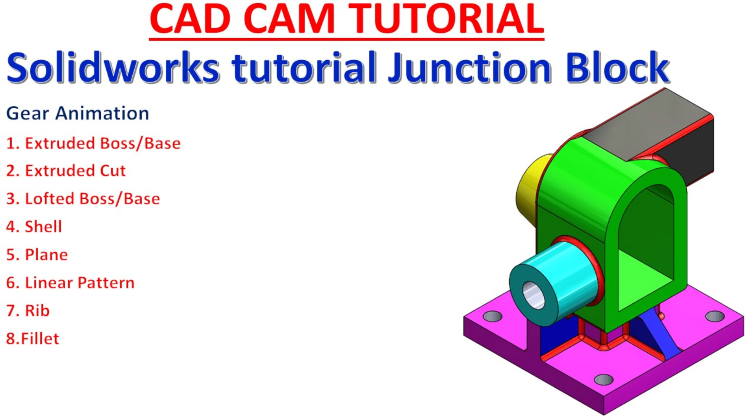Junction block. In this exercise we will try to learn many features, that's why it is a little bit longer exercise. So let's zoom in, this is the front view, and we are going to start from this view.

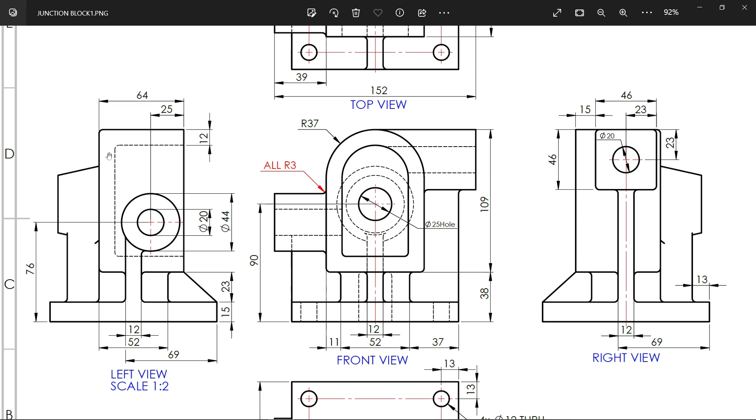Now you will see the centerpiece R37, and this width, this width 37 into 2, height 109. If you see the left hand side view, the depth is 64 millimeter, but this is hollow shape, thickness 12 millimeter. Then similarly at the bottom there is one square type of piece.

You will see, if I zoom, 52 this width. This is center from front view, and from left view you will see this lies at the back side, from this to here 52, and this is 11 millimeter from one corner.

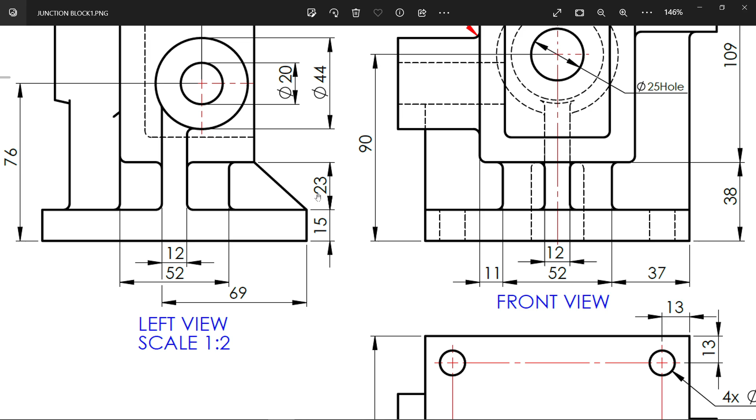Then at the bottom, this width is 23 millimeter, see, and at the bottom there is one square, 12, 12, and the location for this, you will see from this side 37. Just note down from here and go to top view, and from back side, this is the back side 37.

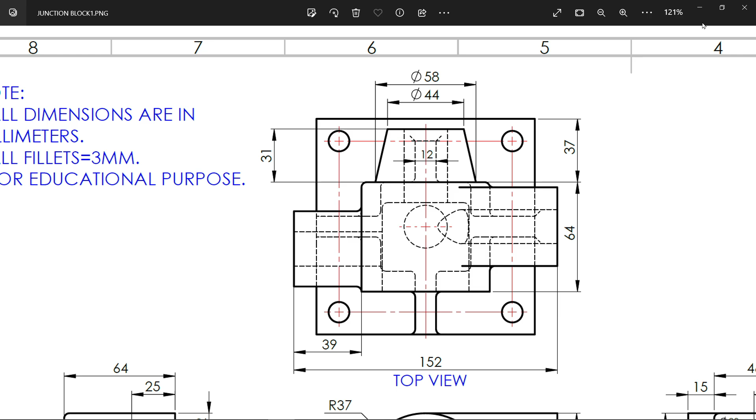Now the most important thing, we have to choose a plane. So I'm going to select right plane, sketch. Let me activate circle, then activate line tool.

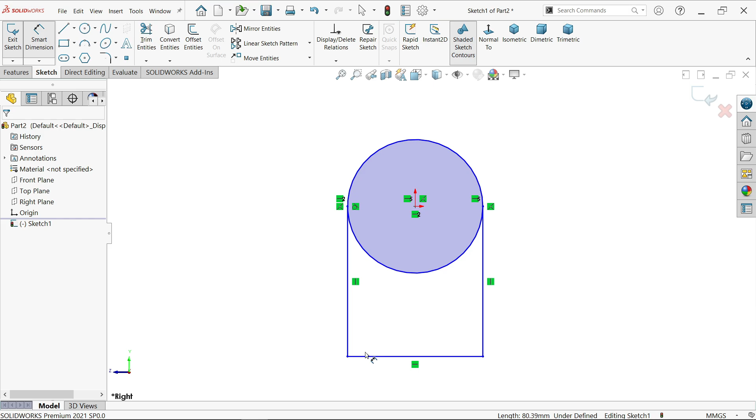Just start from one end, right click, select. Now this is not vertical, so click and it will show you this option, choose vertical, smart dimension. Now hold shift key, select this line and go to top line, move cursor outside and leave, and here's 109. See, if this diameter is 37 into 2.

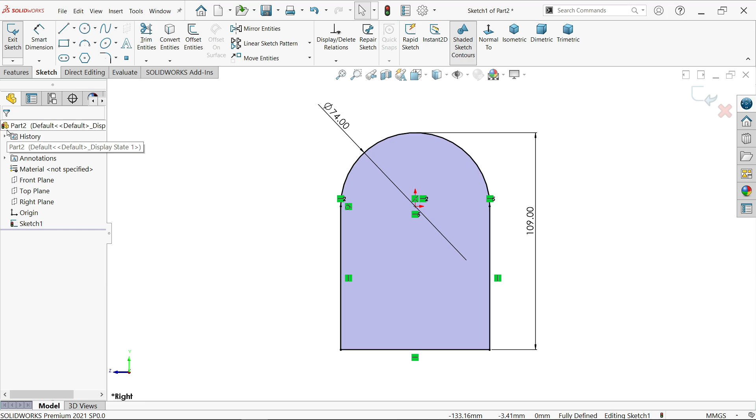Activate trim entity, power trim, just press left mouse and drag, and see this is trimmed. Activate extruded boss base feature. Now start condition we will keep same, end condition direction 1 blind, and here depth 64 millimeter. See, it is moving in one direction, that's it. This is what we want.

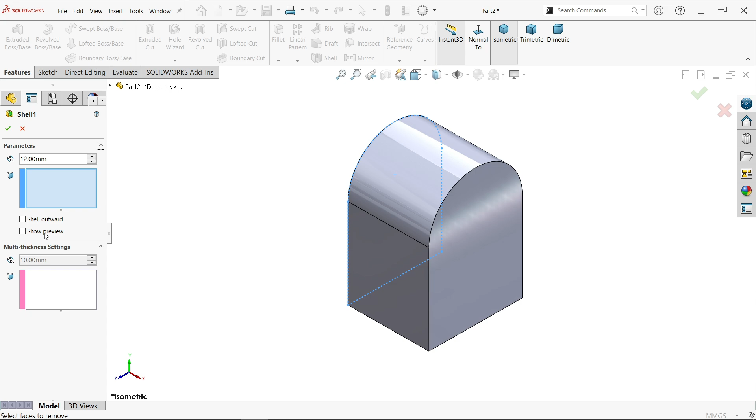Activate shell feature. Here depth 12 millimeter, show preview, and let me choose this face, say okay. Now look.

Bottom sketch. Now activate corner rectangle here, activate smart dimension. Now this is 52, width and length both 52, and from one end dimension shows 11 millimeter, right? So this is any one, because this lies at the center.

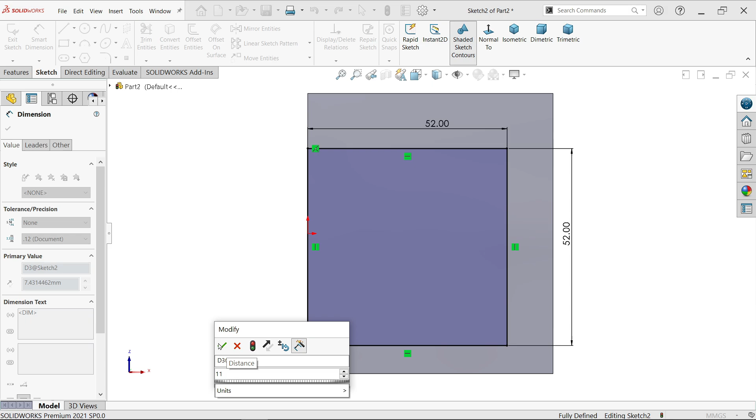If you rotate a little, extrude. Now here start condition same, end condition blind, 23 millimeter is the depth, say yes.

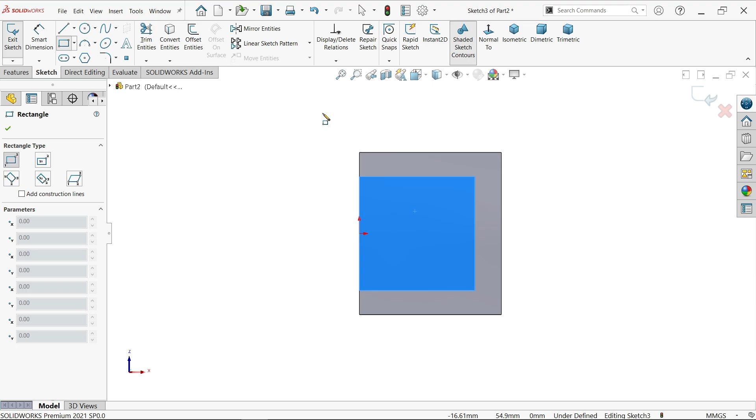Okay, now again select this one, sketch. Now here we have to create a big corner rectangle. Now right click, exit. Now select these two rectangles and make one relation. If you select both and leave shift key, it will show you this option, equal, smart dimension.

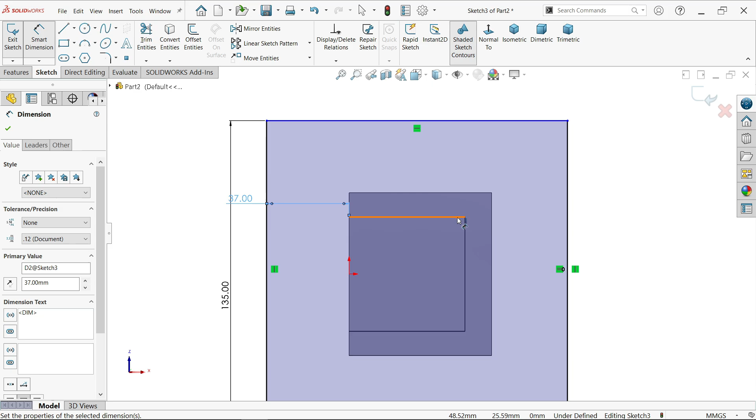135. Dimension from back side it is shown 37. I'll show you in the drawing, and dimension from this bottom face to this edge 37, it is shown in front view.

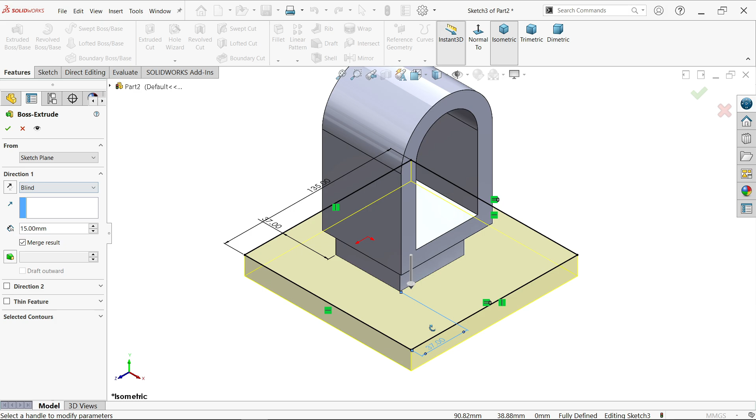Extrude, and the depth is 15 millimeter. Keep end condition blind, and it is moving in the perfect direction, so no need to change it, say okay.

Now there is one hole, but this hole we will create later. Come to this side, right hand side view, there is a 44, 20, this is the hole. You will see the hole up to the end of this wall, 25 millimeter from here, height 76.

So let's do this. Sketch, circle, activate smart dimension, and distance from bottom edge 76, and this diameter 44, and the distance from outer edge is 25 millimeter. Look, this is fully defined sketch.

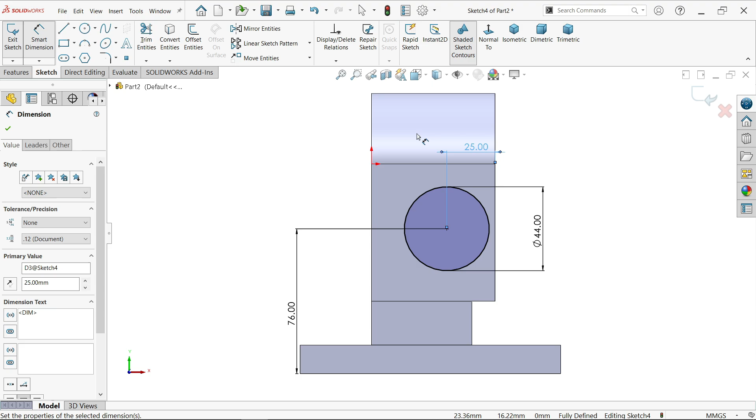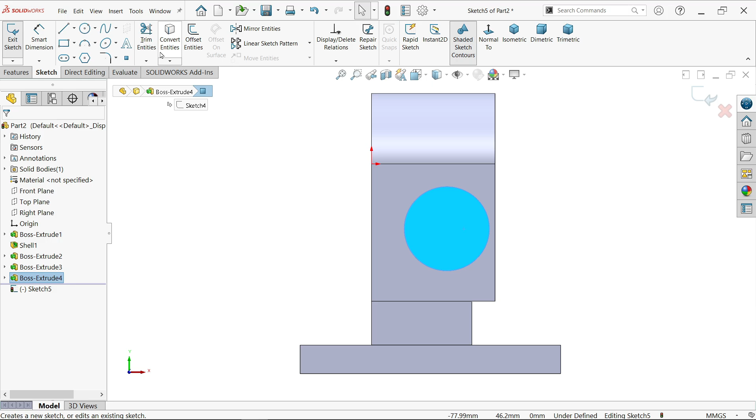And how long we need to extrude? Now you will see in this option 39 millimeter. Extrude 39 millimeter, say OK. Now select this face, sketch, activate circle tool, and keep cursor and you will see the center point.

Draw, activate smart dimension, and this is 20 millimeter. Now again, next extruded cut. Now here there are many options you can choose in end condition. Start we will keep same. Now here either you choose up to next.

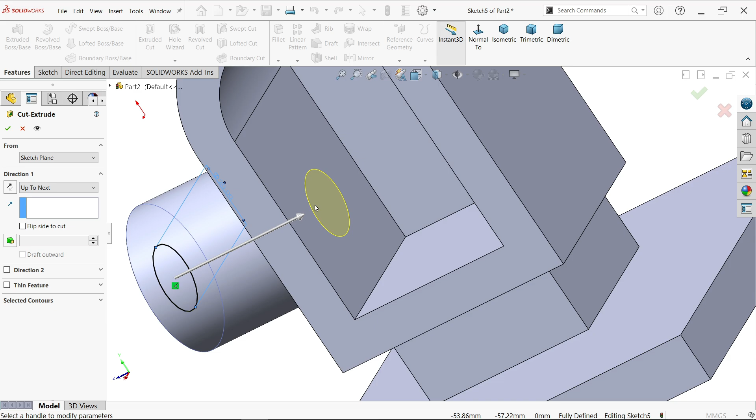If you choose next, this is the next wall, it will cut up to the next. We can't choose through all, otherwise it will cut through all the body. So the best option is up to next. See. Now come to the bottom view.

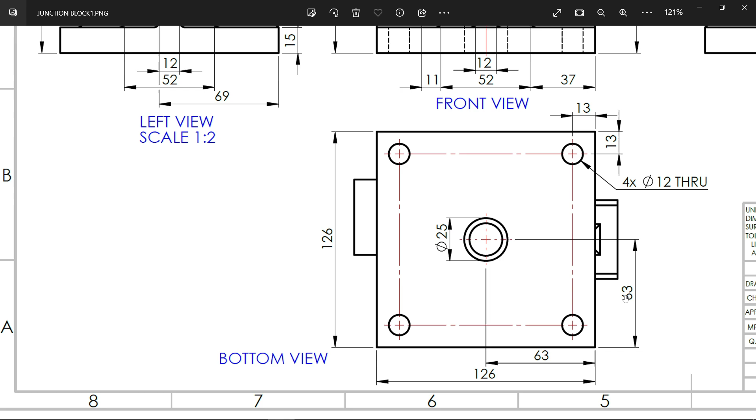There are 4 holes. See, 13, 13, 12, and the distance between this, if you calculate, it is 100 millimeter. Then there is one more hole, this just lies at the center, 63, 63, 25, and the depth of this hole you will see here.

If I'm going to zoom, see in front view, you will see this dotted line. This is the hole, depth 38.

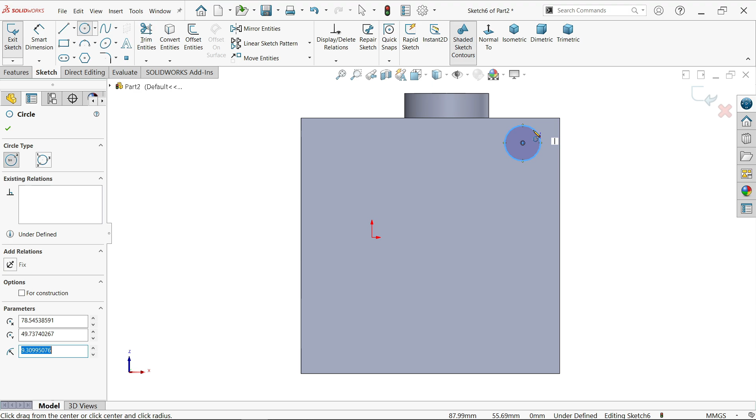Sketch, circle, activate circle tool, smart dimension. Now define this. Diameter is 12 millimeter and distance from one end, both ends 13 millimeter. Select this one and this outer edge.

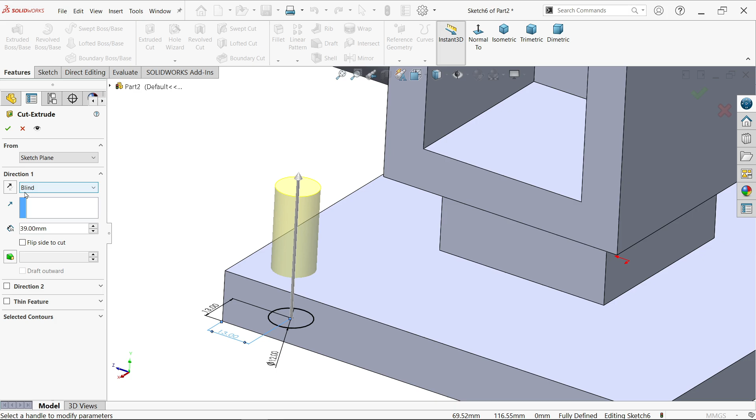Now activate extruded cut feature. Again here you can either choose through all. If you choose through all, it will go up to the end of body. So it's better to choose up to next. Even though you can choose blind and give the depth. Now here again we will do one more thing.

Activate linear pattern, first X direction. I am going to choose this one. Distance you can calculate, it's going to be 100. 2 number of instances. Direction 2, I am going to select this side arrow, 100, and this is moving in reverse direction, so simply reverse this arrow. Here, look. Say OK.

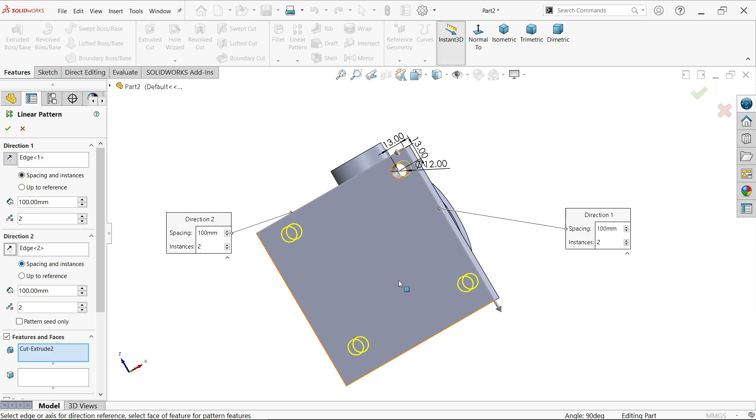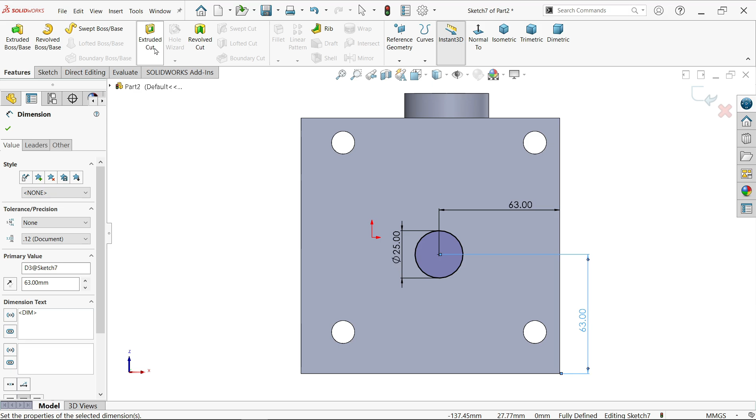Select back face, sketch, activate circle, smart dimension, 25 millimeter, and distance from both sides 63 millimeter. Okay. That's it. Activate extruded cut feature, and here depth is 38 millimeter according to our drawing. Say OK.

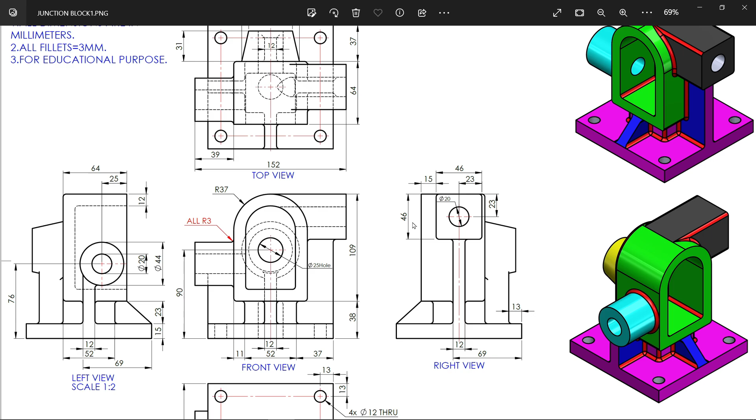Now few things we covered. Now here the next thing, we are going to make this upper face, this one you will see 46, 46. There is a hole 20 diameter, and this lies at the center 23, 23, and from one edge it's 15 millimeter. See, but we have to create a plane. From this face to here it's 152 dimension.

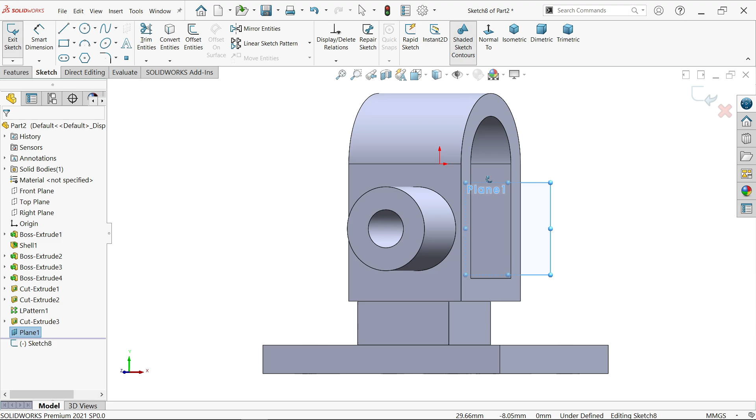Look, reference geometry, activate plane and select this one. And here I am going to choose 152, make flip side, okay, sketch. Now this is not reverse. Now this is the position.

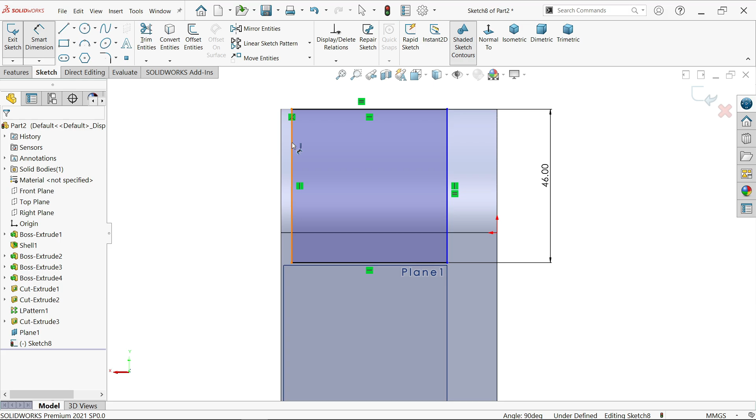Activate corner rectangle, smart dimension 46. Okay. Here now hold shift key, select these two lines, leave the shift key, and you will see this pop up, or even on the right hand side you will see the options equal. Smart dimension 15 millimeter. This is the important dimension. Now this is fully defined.

So go to feature and select extruded boss base. Now in this condition, what you have to choose, plane we have to keep same, but here I am going to select end condition up to surface, and I am going to select this surface. You will see how it moves up to this surface. Say OK. Now look.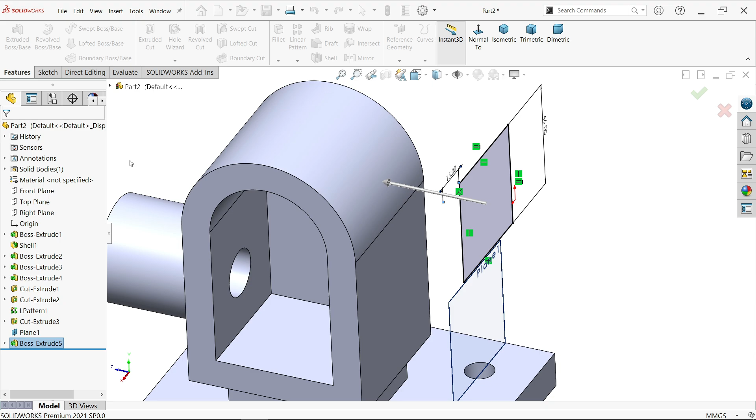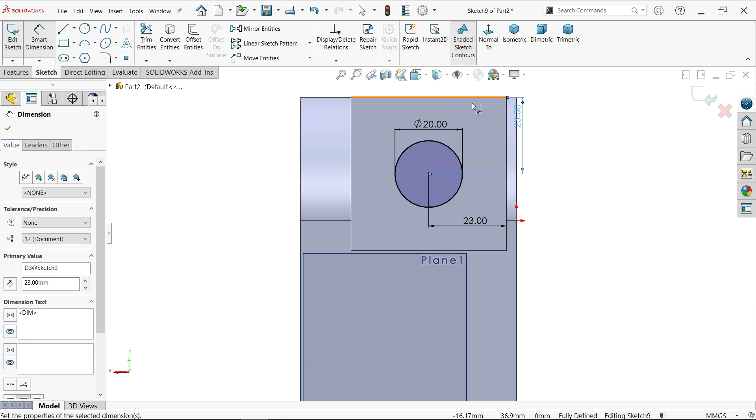Sketch, circle, smart dimension, 20, now distance from both ends it's 23. Extruded cut. Now even here also we have too many options. If I choose up to next, see, this is going to cut up to the inside wall. Say OK. Even though you can choose surface. Look.

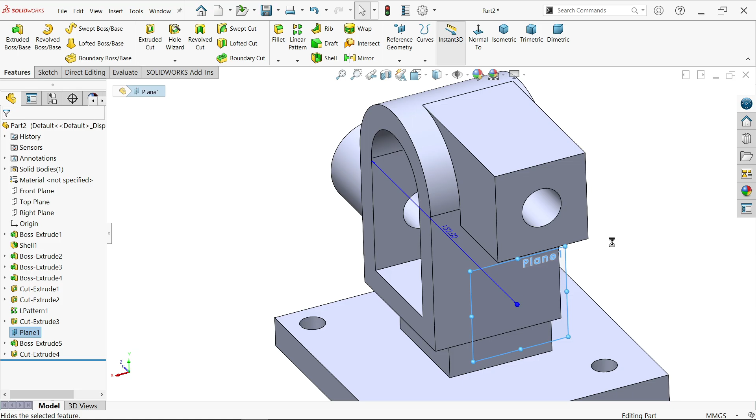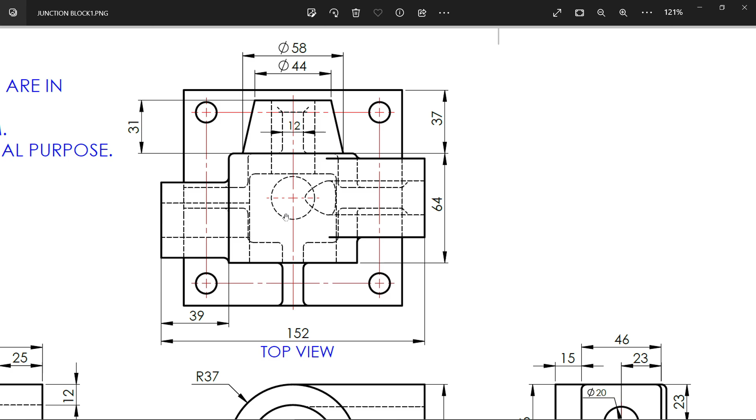Click on plane, hide. On the back side, or if you see in top view, the back side there is one loft. We can create this with the help of loft feature. Now see, 58 inside, 44 outside, and the depth of this 31. So we will create one plane for this, and then there is a hole also, and this hole you will see in this view, 25. Location at this 90 millimeter from here. This is important.

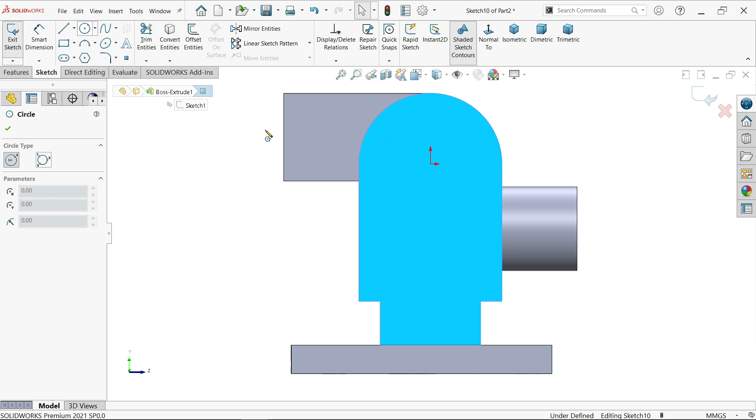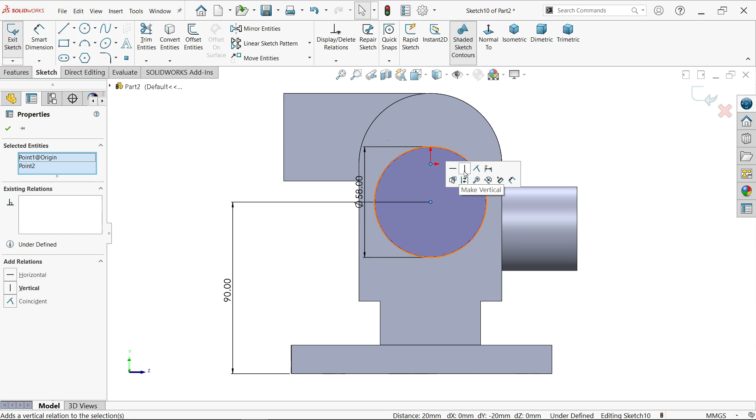Now select this face, sketch. Now here the bigger diameter 58, and distance from bottom edge 90. And one more relation, just select shift key, select these two center points and origin point. Now see, this is fully defined. Simply exit. Activate plane. First reference this one, then here depth 31.

See? OK. Now select the plane, sketch, activate circle, and draw a circle at the same center point. And the diameter of this circle, activate smart dimension, 44 millimeter. Exit. Now let me hide this.

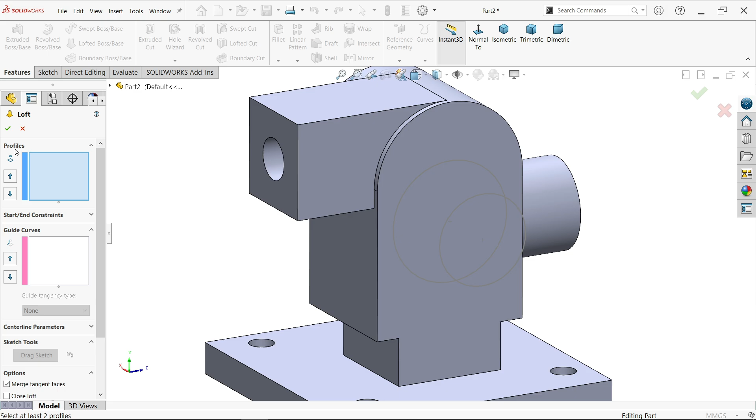Now here go to feature, activate lofted boss base. Now in lofted boss base, first you have to choose profile. So I'm going to select 1, 2, these two profiles. See, these two nodes are okay. This is straight, so we don't need to change because this is a simple thing. So we don't need any kind of guide curve.

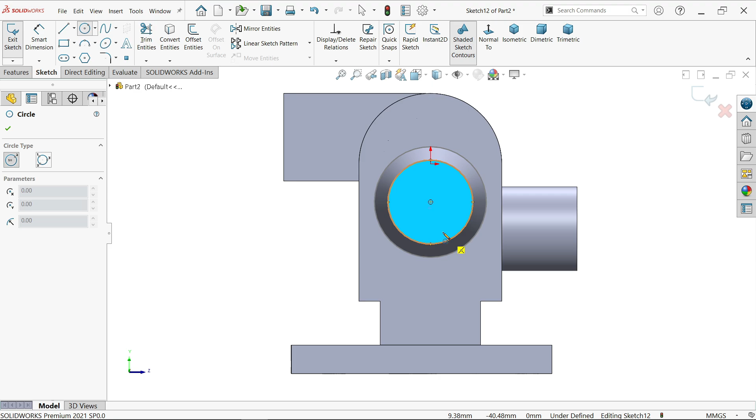Say OK. Look, I am going to select this face, sketch, activate circle, and move cursor, and you will see center point. And here the diameter 25. Extruded cut. Now in this condition, even though you can choose up to next, say OK. See, the hole is created.

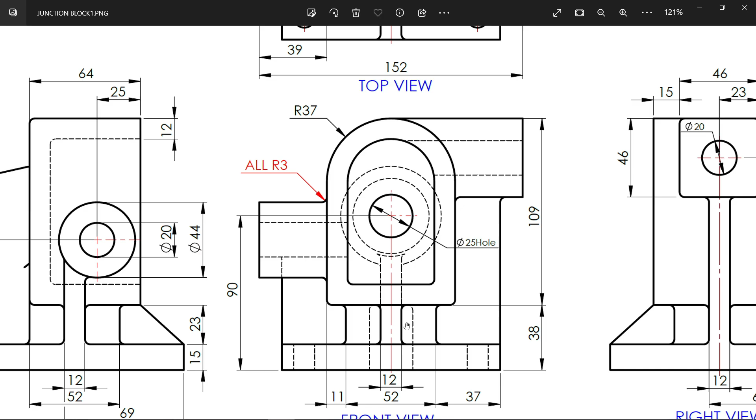Now let me create one rib here. See, there are 4 ribs. So let's try to create these ribs. This rib at center. Now this rib shows dimension from here 69, but if you calculate it, okay, we will make a plane, then we will create a rib. And this is center 12, all the ribs are 12 millimeter.

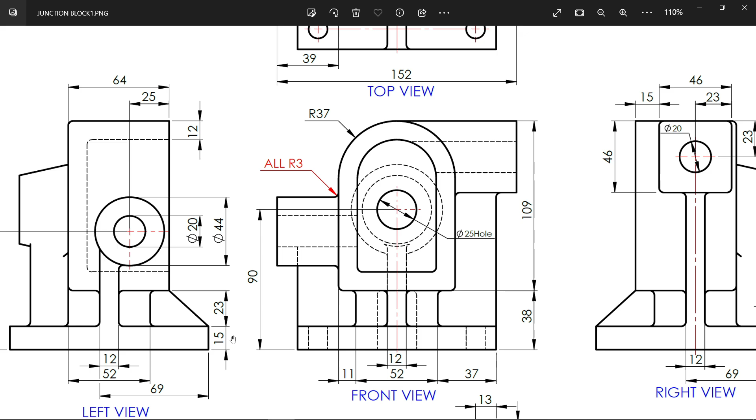Okay, first let me check where our plane is right now. Okay, in front, okay, this is already in center, so I am going to select front plane, sketch, activate line tool, and connect these 2 points. This is fully defined. Go to feature, activate rib. Now here keep both side and depth 10, and look, arrow moving towards body. So don't change anything, extrusion direction, everything same. Okay. Now here.

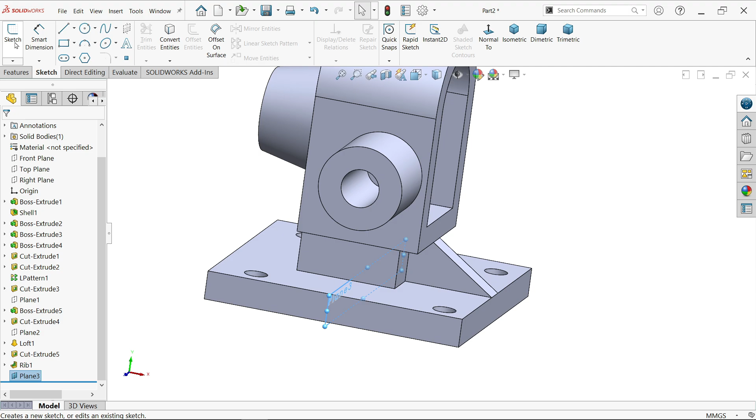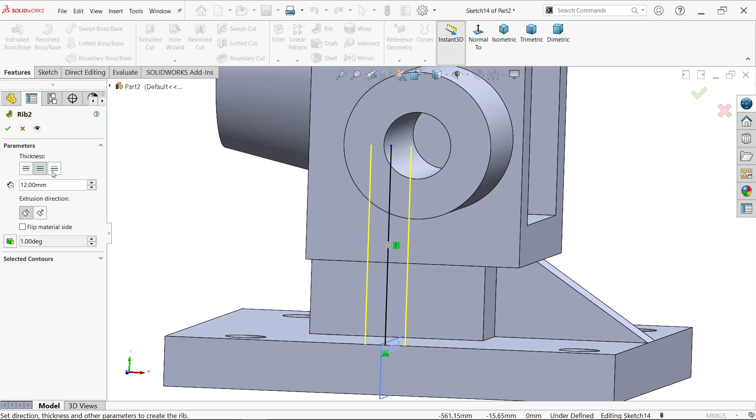Okay, let's keep it as it is. I'm not going to define anything, and I'll show you how. Rib. Now this time I'm going to select this end. Now look how it is going to move from here to here. 12 millimeter, keep as it is, say okay. Now look, the rib is created.

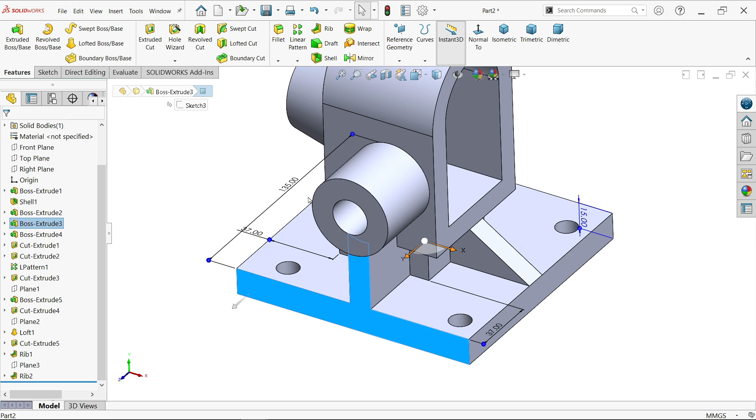Now hide the plane. Now there is one problem. We selected here 135. Just click 126.

Okay, now everything is perfect. Now here we have a rib at center. So simply let's try any plane. Okay, front plane is going to work for this.

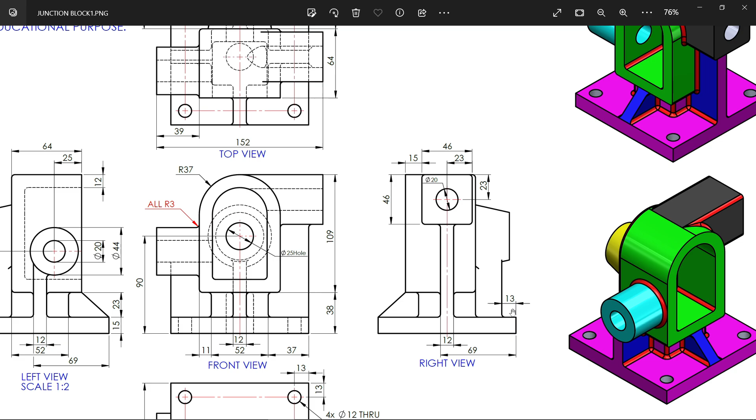Now in this case, this is center, but here you will see 13 millimeter away from edge, corner edge. See this one, and this is also lies at the center of this. And if you see, this is vertical to this, the second one. I'm talking about the second, fourth one, last one.

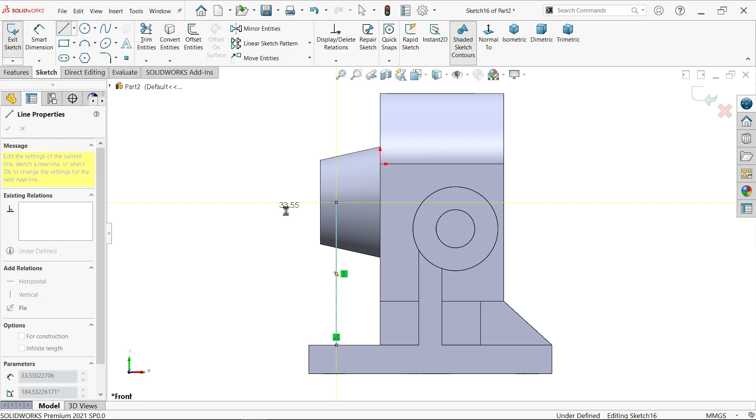Sketch, line, and start from somewhere from here. Smart dimension, 13 millimeter. Rib. Now see arrow moving towards body.

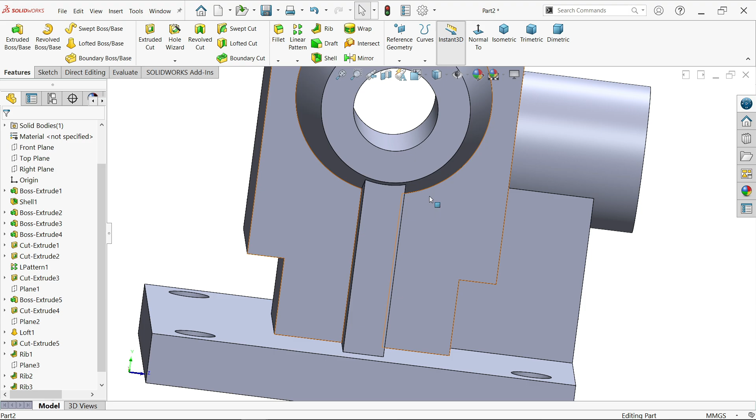Keep mid one 12 millimeter, rest as it is, say okay. Now see, this is not going to make anything inside. It is perfectly making this side.

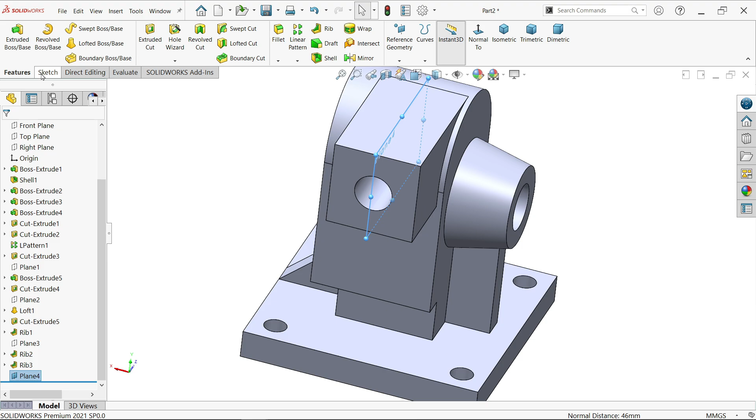Now similarly, we have to check which plane is going to lie, otherwise we have to create a plane. Okay, we have to create a plane at this center. So the simple way to make it plane, I'm going to select 1, 2. Okay, now create it at center, sketch, line, and draw from here up to

this line. Activate rib. Now see arrow moving towards body. Thickness, move both side, rest as it is, say okay. Look.

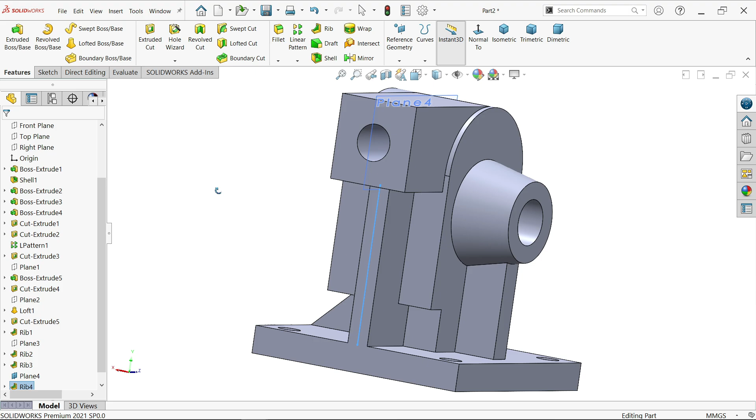Now click hide plane. Now here we have to choose all fillets, 3 millimeter.

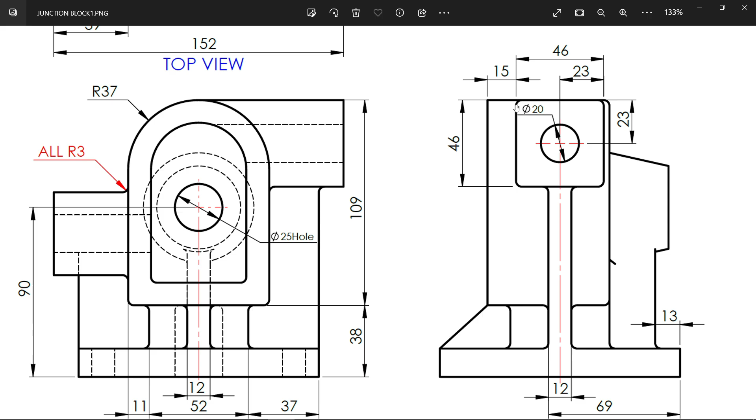Now just take a close look and see the fillets. Inside there is a fillet. See, this side also has a fillet. Corners, you will see these corners have fillet. Back side also has fillet. You will see here. Then here also see back side fillet. Inside also there is a fillet. This bottom also has fillet. And okay, this front doesn't have fillet.

Back side, this corner, and this doesn't have, and these ribs have it. This rib also, even though all these ribs have fillets.

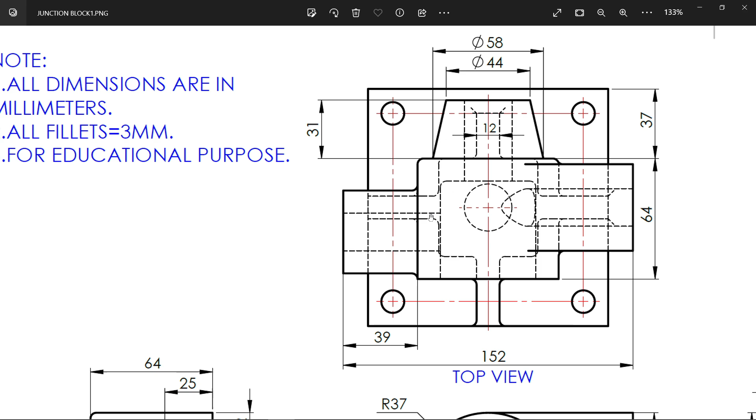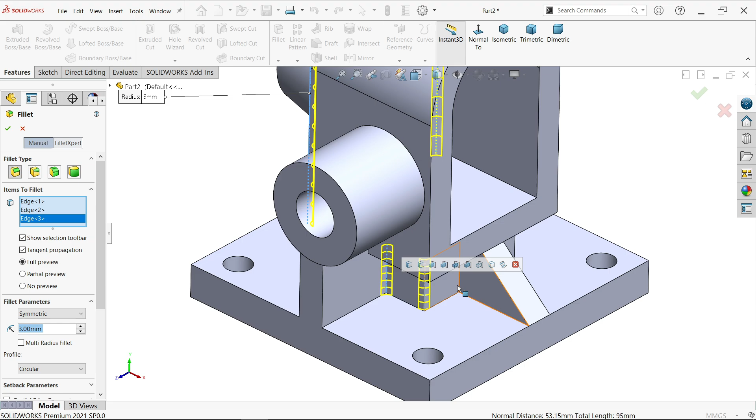Fillet, constant size fillet, symmetric, 3 millimeter keep radius. Now first we will try to choose vertical fillets. Vertical fillet makes your life more easier because the next fillet is going to make a perfect shape.

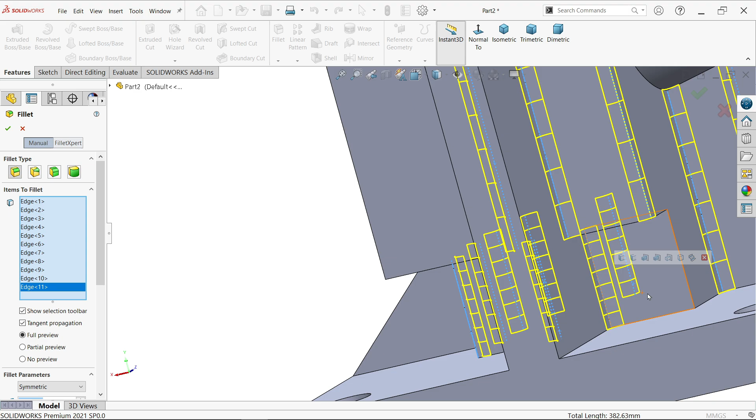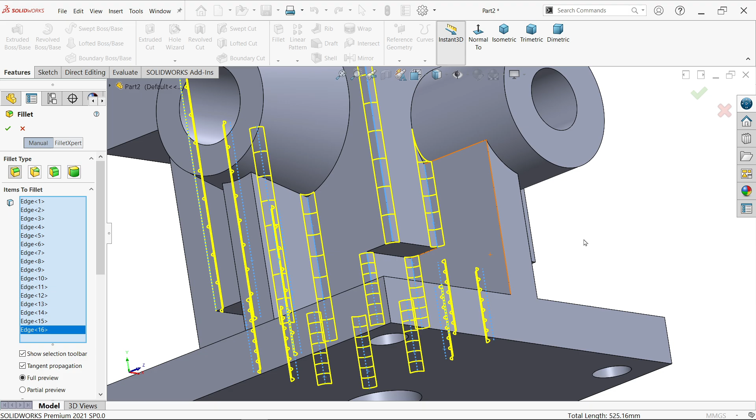Okay, this doesn't have fillet. Okay, come to these vertical ones, inside also. Say okay.

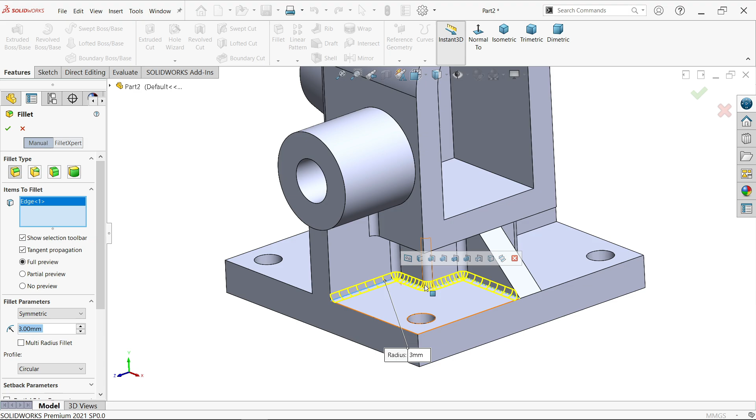Now choose again fillet, 3 millimeter. Now see, if I'm going to choose, it will select all at once. This is the advantage if we choose vertical fillet first. See, here also we have advantage. Here also we have advantage.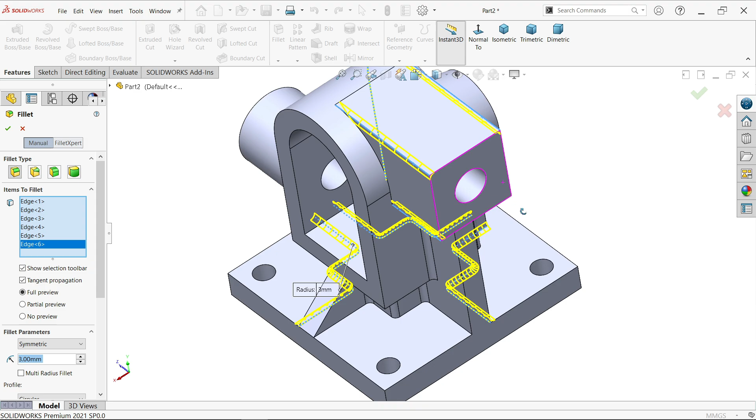Okay, let me select these four corners separately. Okay, that's perfect. Fillet.

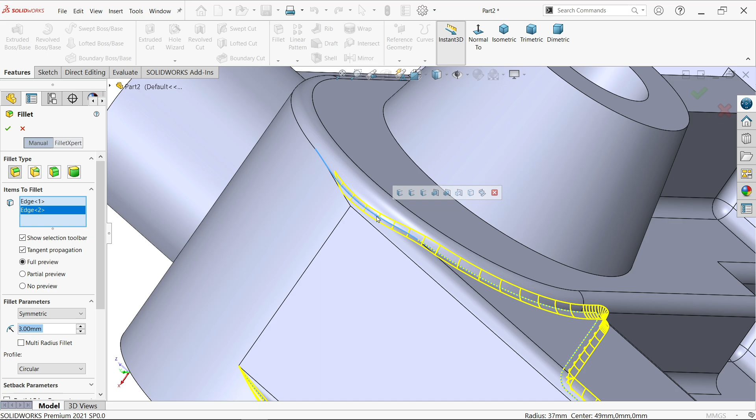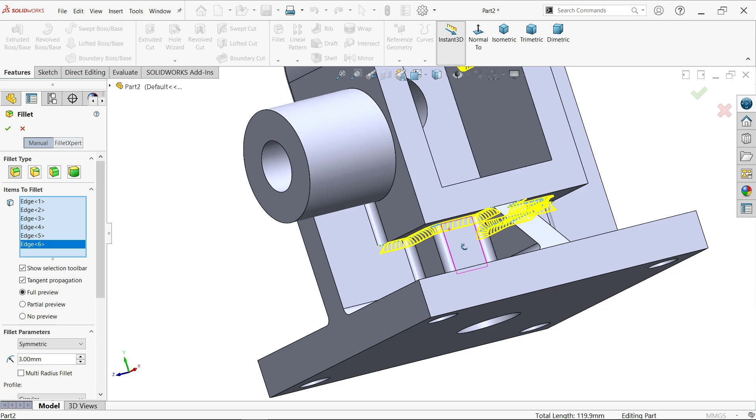Now I'm going to select this edge. I don't think we need to select this edge, but see, it is going to similarly comes here. Okay, here also balance. Say okay.

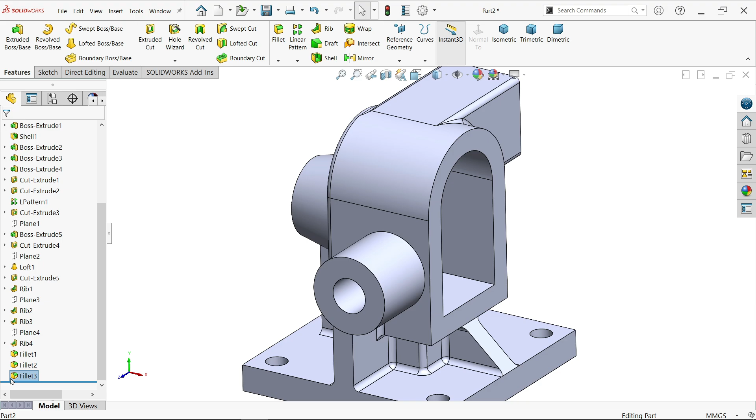Now let's check again if anything is left, or I hope we did all. Even though if you want to add, just click edit, and even if you want to add, just select this one. Okay, now here we go.

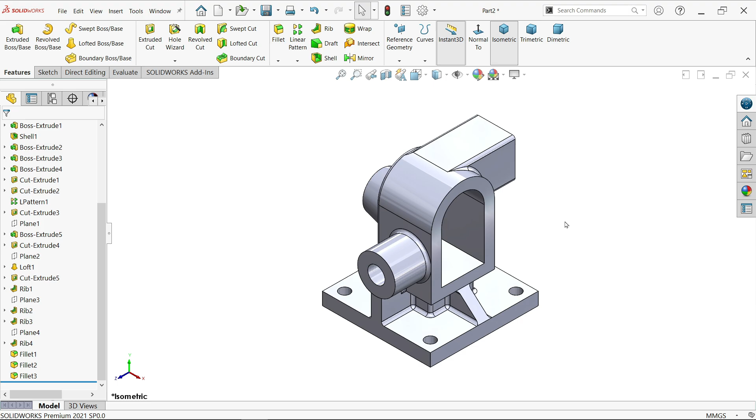Okay, now let's try to add color. Now the first one, shell, you can simply go to edit appearance, this one. Okay.

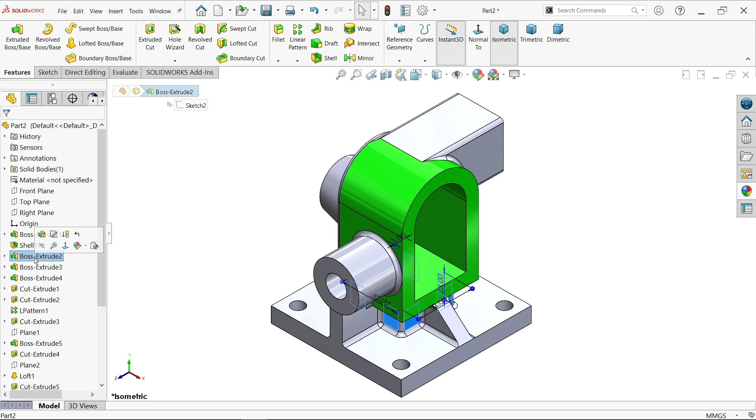Now the bottom one, bottom boss, edit, pink. Okay, now this one, even the cutout depth of hole, even okay, let's leave the hole.

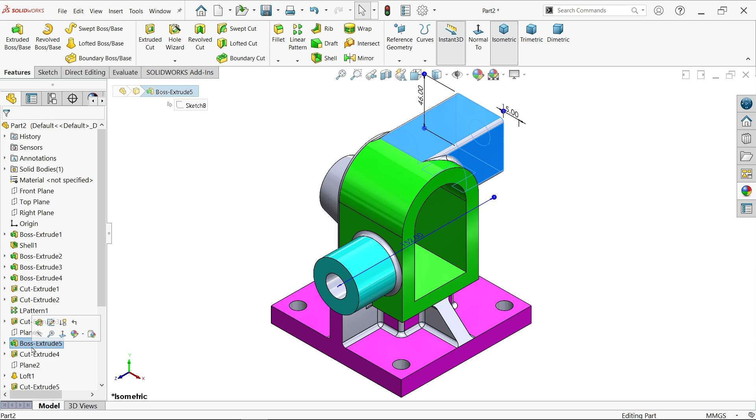Fine. Okay, now let me check this one. Lofted, edit appearance, and yellow.

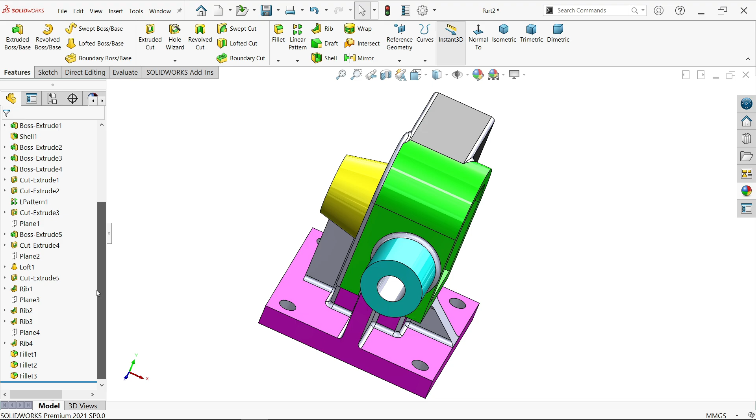Okay, directly choose this fillet, edit appearance, and directly choose red. Okay, now there are many ribs. Now all ribs, okay, let me choose rib 1. Hold control key, not shift. And for rib I'm going to select blue. Okay.

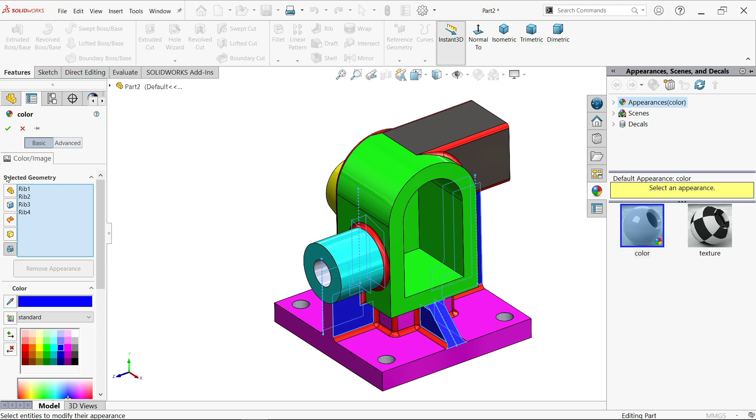That's it. Now this face is not going to turn blue because this is attached with this. Now but the face is changed, color changed. Now look.

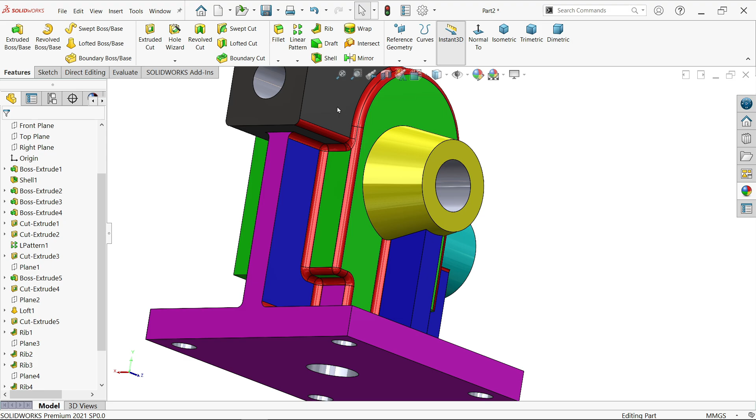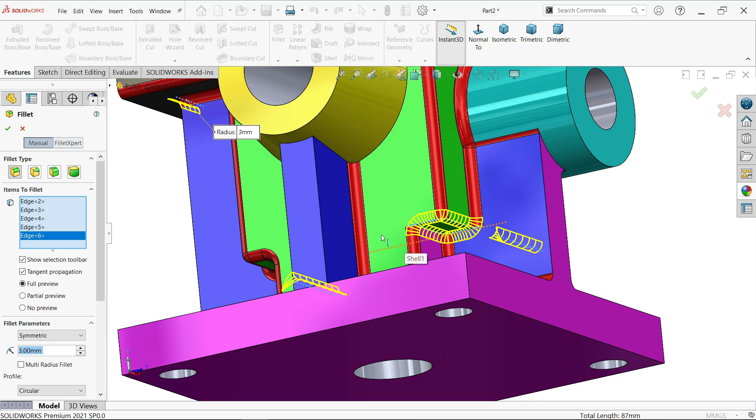Now here I feel some few more things are remaining. Now I'm going to create a new constant size fillet, 3 millimeter, and I'm going to uncheck. Okay, here it's not going to apply. This end is needed here, and this end also, this end also, and comes here. And in this case this full edge, and this inside also we forgot to add. See, this side here is available. Say okay.